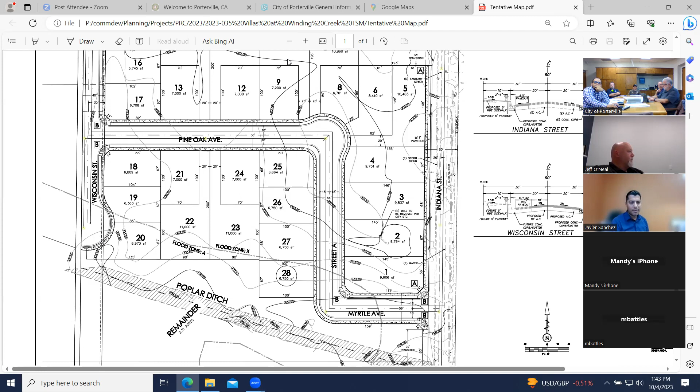As part of that, we also need to maintain the landscape strip around the bulb, and the sidewalk would still need to stay offset from the curb and gutter.

As far as the flood zone, where you show that designation, it's not that building is prohibited, but with it being flood zone A with no base flood elevation established, we'll need to meet certain criteria to have those be buildable. It may be worth looking into the FEMA requirements more to make sure no analysis is required beyond what our local floodplain ordinance states.

Would that apply specifically only to lots 20 and 28? 20 and 28, unless it encroaches slightly into 1, 27, 23, 22, and 19, if a structure is built within that floodplain. But for sure there's no way around it on 20 and 28.

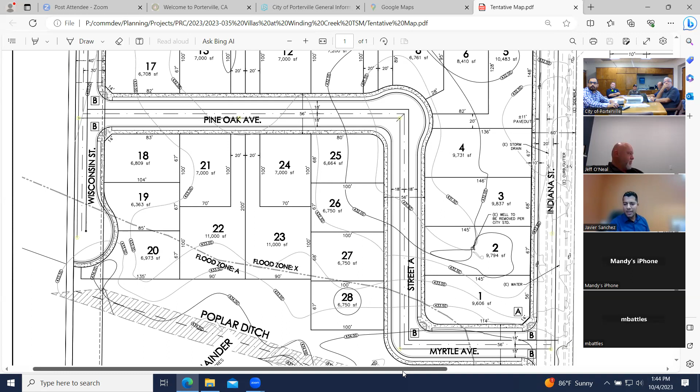Thanks. And then on Indiana, we see—I'm assuming there's a block wall proposed along the Indiana lots, right? Correct.

Our development ordinance requires separation between the back of walk and a wall. Typically we've done 10-foot landscape easements, but I need to discuss that further with planning as far as whether there's variance on that, because it will affect the depth of those lots and potentially the buildability of lot 5.

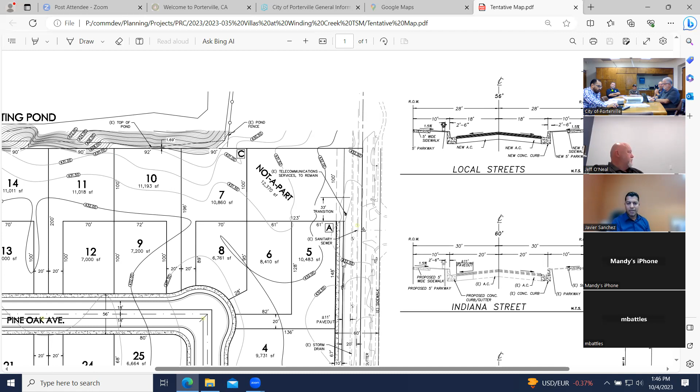But otherwise, the cross section looks good on Indiana. Even though the circulation element shows a major arterial continuing north of Gibbons, since the connection across the 190 isn't happening, the demand for a major roadway isn't necessary, so this will just be a standard local collector instead, which complies with the 60-foot right of way you show.

So the only thing we need to talk about more, and we'll provide direction in the comments, is the necessary landscape easement. Besides that, Public Works was going to talk about an easement line from the ditch to the pond. That's all for engineering.

Javier, I'm a little confused—if Indiana's not a higher density or classified street, and it's actually a collector width, then why is the wall even going to be a requirement? It applies to both arterials and collectors—the landscape requirement, that landscape separation between a back of walk and a wall.

It doesn't apply to local roads, residential roads, right, Javier? Correct. Well, it does—the development ordinance states that when there's a condition of a back of walk to a hard edge like a fence, there's a requirement to maintain a minimum of 5 feet separation.

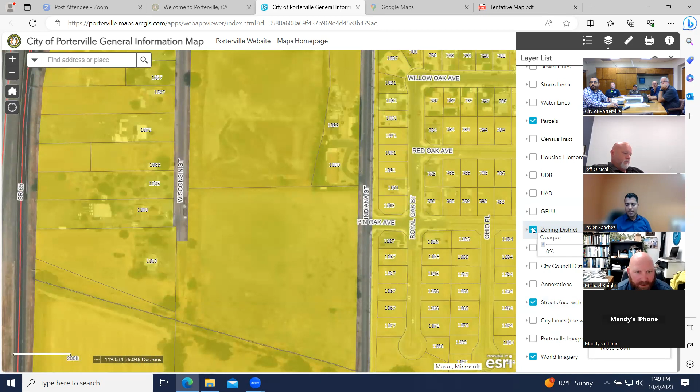Thank you, Oscar. I know we've had some tentative discussions regarding the alignment of the property line adjacent to the ponding basin to the north of the proposed development. We'll need to look at that. I'm sure you've already had that surveyed, Tom, and we can go through what that property acquisition looks like for the right of way for the existing pond. There's also been discussion about the current delivery mechanism, the turnout from the poplar ditch that goes into that ponding basin that feeds it.

The hope in previous discussions of projects proposed in this area would be that as the storm drain is developed for this property, it would turn out and deposit into that ponding basin. Anything beyond the service of the subdivision would be a reimbursable cost to extend that and restore the connection to the poplar ditch. That's been discussed under previous proposed plans and would be the same condition under this development.

Are we allowed to use the Indiana Street storm drain that's existing out there? If I put some catch basins and catch everything off of Myrtle and put it out there? The proposed alignment would be off of Wisconsin. Yeah, I'm possibly going to use catch basins, tie into the Wisconsin pipe that's going to be put in there for our runoff, but I also want to use Indiana as well. Yeah, that would be acceptable.

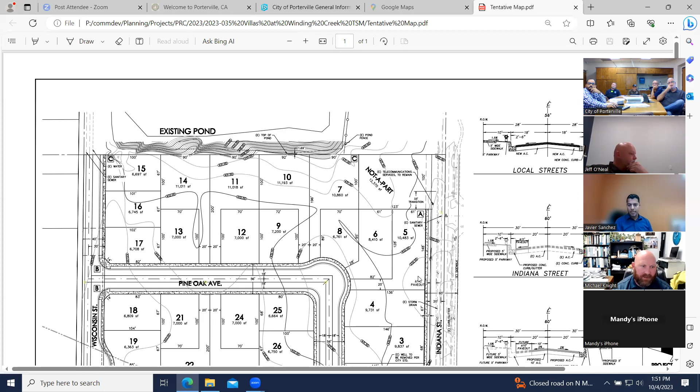Okay, so there's still a little bit more on the plan as we move through this. If you could go back to the plan, Oscar, please. So as you see, I'm assuming your last connection point to that basin would be off of Pine Oak. Yeah, correct, so the extension—that's for the Wisconsin side. Correct, so to maintain that connection point that has been a service to that basin, we would maintain the connection down Wisconsin to reconnect back to the poplar ditch. Right. Okay. And that's probably the most of my comments at this time.

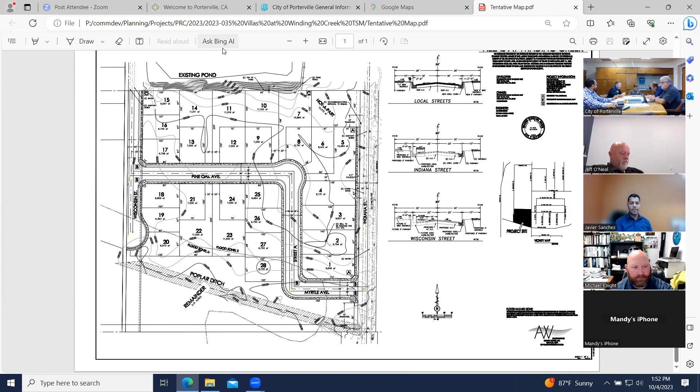The easy ones are basically the fire hydrant spacing: 500 feet for residential, and 300 for multifamily, commercial, or mixed-use projects. No structure shall be greater than 400 feet from a hydrant as the hose lays, and we must maintain 2 points of ingress and egress.

Now, the more difficult stuff is these flag lots, which are difficult for us to basically police access, the whole 9 yards, because we're dealing with human behavior. So I have a lot of comments, but to narrow it down, if this pathway exceeds 150 feet, there has to be a required fire department turnaround. We have to be able to get within 150 feet of the rear wall, halfway basically of the rear wall, as the hose would lay.

For example, if a fire truck came here and the house was built right here, as long as we measured 150 feet to that structure, then this doesn't require the turnaround, but it's still required to be a fire lane and marked as such. So with something like this, we would want that recorded, because they need to be maintained. They need to know that we can summarily abate cars parked there at midnight, for example, at the vehicle or property owner's expense. So those are difficult—there's a lot of comments in here, but essentially that's what that's all saying.

And again, we don't really know that until we start seeing the proposals for the development of the lots. But I want you to know, as a developer, that there's going to be some issues with regard to that as it moves forward. So.

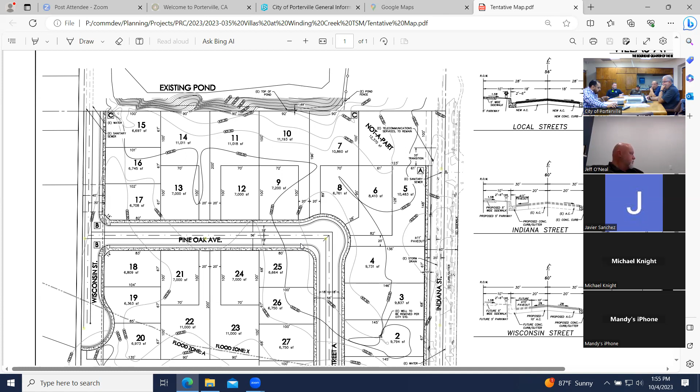Next with Brianna. No comments. Thank you.

Next with our police department with Mark. No comments from the police department. Thank you.

I believe that's all from staff. Refuse? Yeah, they said no comments.

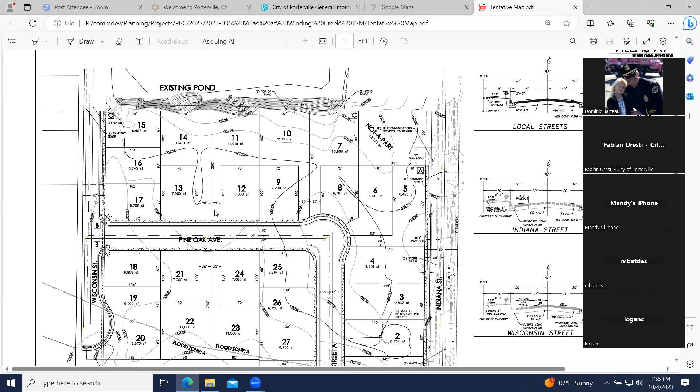On the refuse, the cans that come out - I've had places where they wanted us to mark where the cans are gonna be. You guys are okay with having them put out front, correct? Because the trucks won't be driving up in there. Would you be able to answer that, Brianna? Yes, just as long as they're out on the road. The trucks are not going to be driving onto those lots. Okay, thank you.

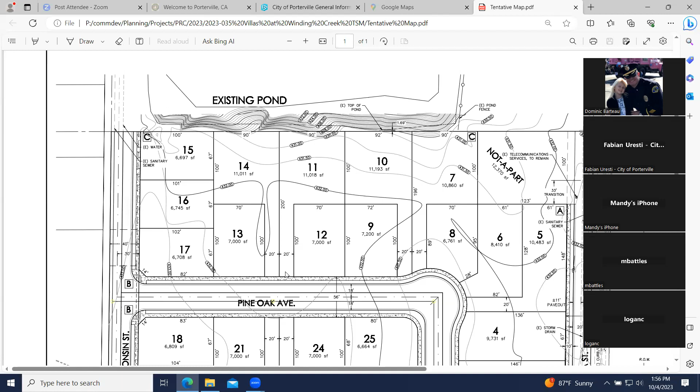Just to chime in, under the proposed layout, it's going to be a challenge because these lots in the back, like lot 11 and 12, will have to bring their cans out and sit them in front of lot 12. Depending on how those are configured with driveway approaches and parking on the street, those will be issues as we go to serve residents. It doesn't necessarily stop anything from moving forward, but it will be a challenge - either cans being missed because they're blocked or too close together, or other challenges with the layout as it exists.

Well, on those flag lots, are we allowed to do one single drive approach, or do we need a separate drive approach for each lot?

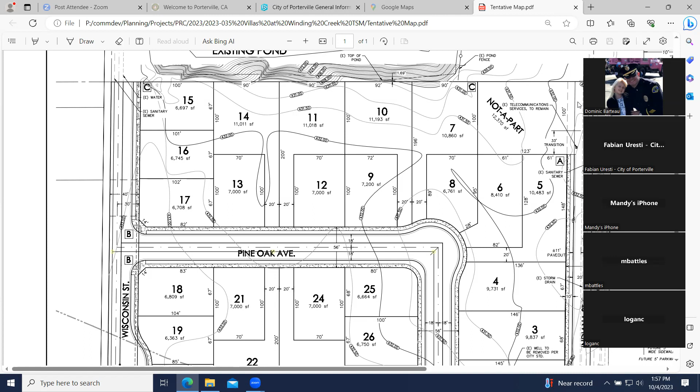From my standpoint, as far as fire is concerned, I need to have a minimum 20-foot access to get to the structures. I don't know what the city's going to require, but if that straddles the property line, it has to be recorded on both properties. If it does turn into a fire lane, it needs to be recorded so that it's protected.

I meant out here, for the drive approach - so there's gonna be 10 feet on either side for these people to put their access. I need to maintain at least 20 feet. So if you put in separate approaches, those may have to widen.

Did you catch that question, Javier? Yeah, it is typical practice that each property has their own access, but we're not against it being shared - easements just have to be put in place to make sure that access is maintained.

Thank you. If there's no additional questions from the applicant, we'll be compiling each department's comments in a letter that should be out in 2 to 3 weeks from today. Thank you.

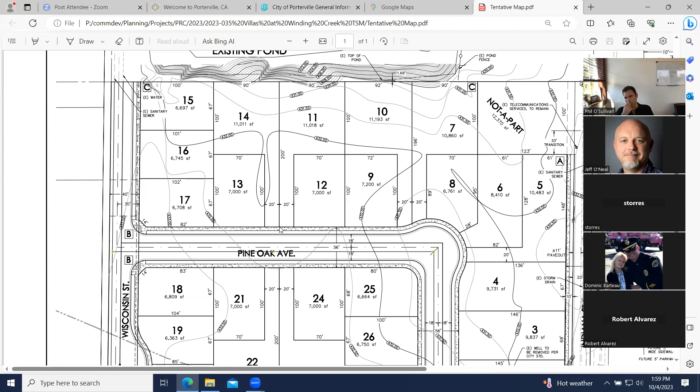So we have item number 2, which is project review committee number 2023-037, where the applicant is proposing a multi-family residential project.

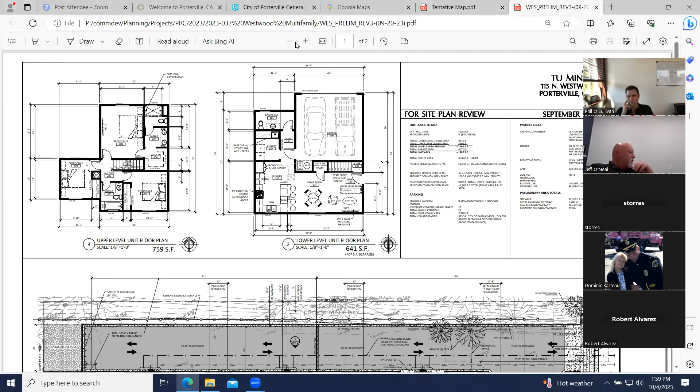Let me go ahead and share my screen here. So what the project is proposing is 3 two-story duplexes consisting of a total of 6 residential units. The subject property is located at 115 North Westwood Street, on APN 240092011. The property is in the RM3 High Density Residential Zone District and has the general plan land use of high density residential.

As far as comments from planning, the use is a permitted use. We do meet the minimum units per net acre, which at this time is 10 units per net acre, and that is the minimum.

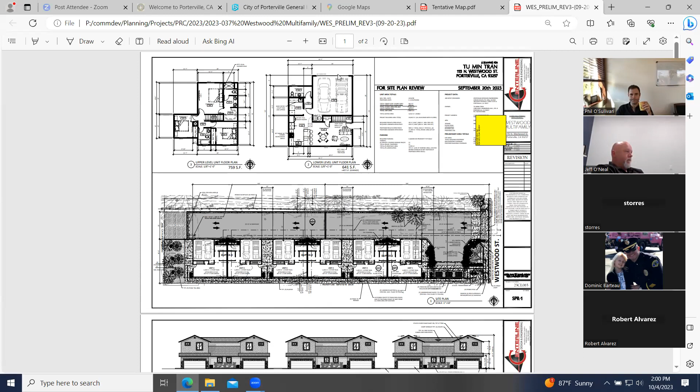As far as a question I have for the applicant - I did not see any private open space for each unit, which would be a requirement of a minimum of 50 square feet. The code states that the private open space shall be accessible to only one residential unit by a doorway to a habitable room or hallway. I do see you provide some open space, but I wasn't able to verify the private open space for each unit.

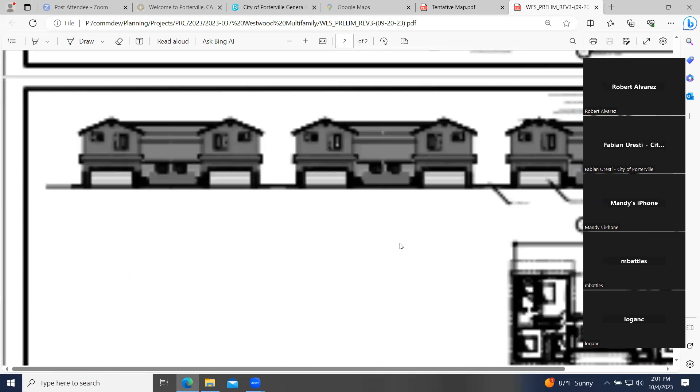As far as other comments, the structures do meet setbacks, meet our minimum architectural articulation for the units, and any landscaping complies with our section 303. The trash enclosure looks to comply with our development ordinance as far as design, location, and materials.

Any fencing proposed for the project needs to comply with section 300.03. Any signage complying with section 305.08, which allows multifamily residential projects 1 building mounted sign and 1 monument sign, with a maximum cumulative sign area of 32 square feet. Pretty much standard from our planning as far as complying with our development standards.

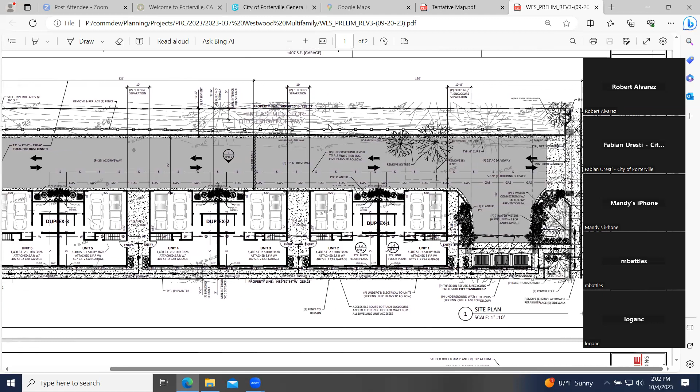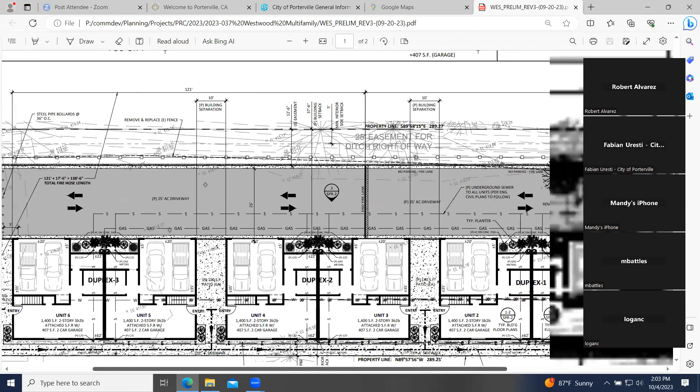That's our comment from planning. With that, I'll move along to the fire department with Clayton. Okay, so basically it looks like the proposal meets the requirements. I've just listed what's required: complying with the latest applicable codes, fire hydrants placed on distance, no structure greater than 400 feet, hydrants in place and accepted prior to any combustibles being brought onto the site. You've addressed the common driveway issue being 150 feet or greater. Required fire apparatus access turnaround is not going to be required based on the proposal. Maintaining the minimum 20-foot roadways and address numbers. So as this proceeds, it looks like what you've proposed meets my requirements.

Thank you, Clayton. Next with engineering with Javier. For engineering, it's just providing a drive approach with an accessible path around it and providing a street light at the north end of the property. And that's all engineering has.

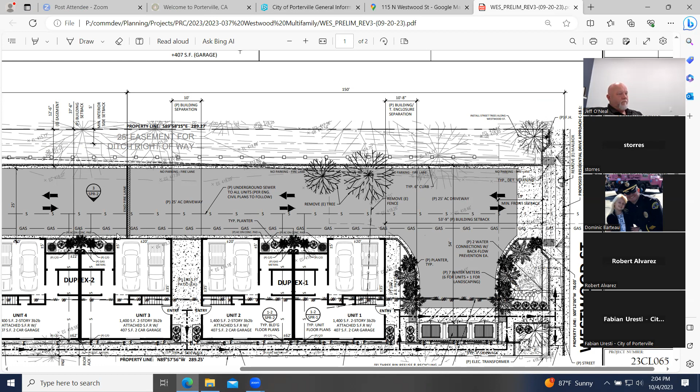Thank you. Next with building with James. Thanks, Oscar. It looks like standard construction, so any comments from me would be during plan review, but no comments at this time. Thank you. Next with Robert. No comment. Thank you. Next with Brianna. No comments. Thank you. Next with Mark with our police department. No comments. Thank you. Any comments from our public works director? No comments. Thank you.

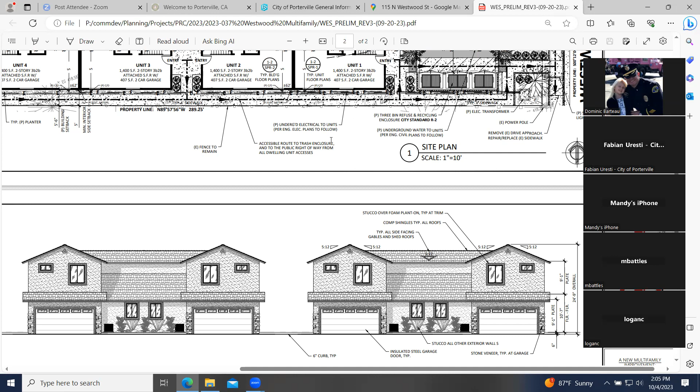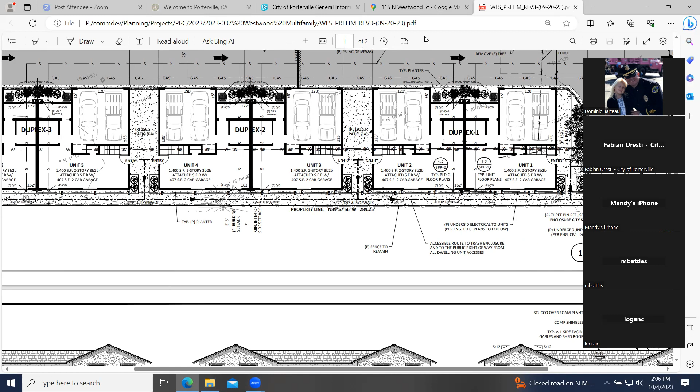That's gonna be all from staff. Are there any questions from the applicant related to today's application? No questions. We'll revise that private space, Oscar, and then proceed with getting full construction drawings submitted to you guys as soon as possible. Sounds good. Thank you, Logan. We'll provide these comments to the applicant in a 2 to 3 week timeframe from today's meeting. I'd like to thank the applicant on the proposed development and look forward to getting this finalized. Thanks, guys. Thank you.

And then we have the third item on today's agenda, which is Project Review Committee number 2023-038 for Sports Cuts, located at 41 North Main Street.

So we do have the application. Revised it? Yeah, they revised it. The application proposes a project for the barbershop, which is a barbershop with a sports lounge. The applicant is requesting a conditional use permit for alcohol sales under a type 48 license.

I'll start with planning's comments. The use would require approval of a conditional use permit, which will be a public hearing. It's a discretionary process from our city council. There are fees associated with the conditional use permit; that fee is $1,164. It will require an environmental assessment, but we can make the preliminary determination that it could fall under a category of exemption, for which the city will still provide a notice of exemption document for a fee of $79.

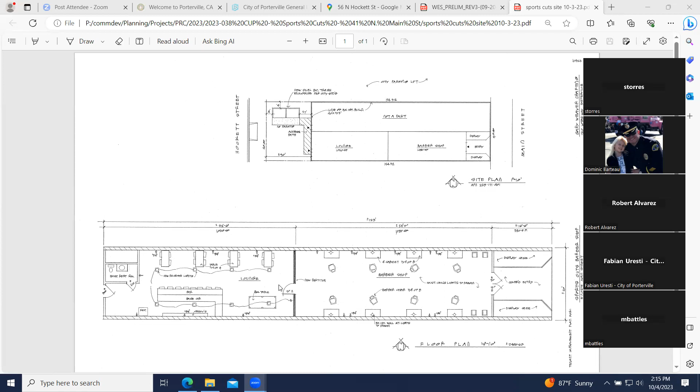It's hard to judge that. What we do during plan review and inspections is just go off of how many fixtures there are - we can tell if that's going to be enough. We shut the lights off, the emergency lights come on, and we make sure it's bright enough. A person in the dark should be able to see, hey, that's a table and chair, I need to go around that - rather than being stuck in the dark not knowing how to get out. You can see the exit sign, but then you're tripping and falling and people are tripping over you because you can't see.

Some of those lights get mounted on each side of the room, and some get mounted in the light fixtures themselves inside the space, so there's more than one way to do it. These have a battery backup, so when the power goes out, the light just stays on - they have a red light on them. So that emergency lighting is important, and a good rule of thumb is in the dark, when you activate the emergency lights, you should be able to see your feet - you should be able to see your toes.

Another thing - the 2-hour rated wall. Everywhere I've looked they say 1 hour, and I've seen that you double back it or something - there's a standard for a 1-hour or a 2-hour wall. So the code, when you look between an A2, which would be the bar lounge, and a B, there's a table that tells us what hour rating that separation needs to be. So it is a 2-hour wall, and I can show you that if you need.

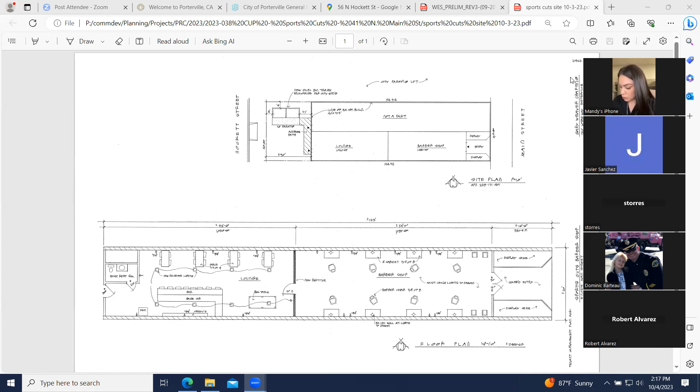We also need the separation between the north section as well. But there's more than one way to build a 2-hour wall, a 1-hour wall, or a 4-hour wall. So each wall has a design that's gone through and passed that says, here's how to build a 2-hour wall. Gary would just need to get on the internet, find the design - there's a code number that'll say, design is 10024 or whatever, and we can look that up and confirm it's correct. There's a detail showing a side view of how that wall is built.

Like Clayton said too, the wall between - since it is one building, with the north part, even though it's not being used - the code between a B and an M, or an A2 and an M, would have to be looked at too. Those wall ratings would need to be constructed to meet that requirement. Your A2 is always going to be the most restricted because there's a lot of people in there, people are drinking - the code doesn't look at alcohol, it just looks at safety.

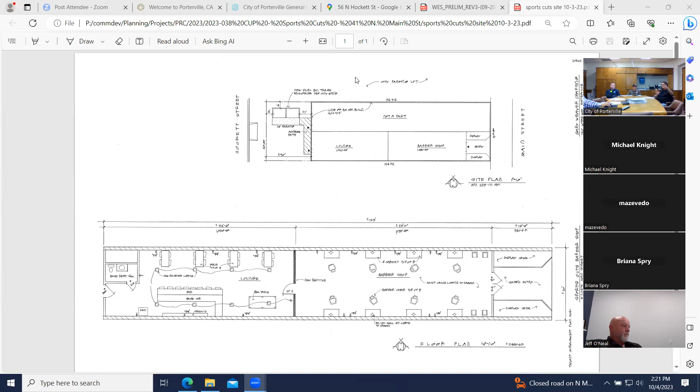Oh, and the bathroom, is it, because there is the bathroom on that building. There's a door to the other bathroom. Well, that brings up another point, because I think a type 48 doesn't allow children to come in and remain in the bar area. So if your patrons are gonna have to access the bathroom, how does that work with them, going through the bar?

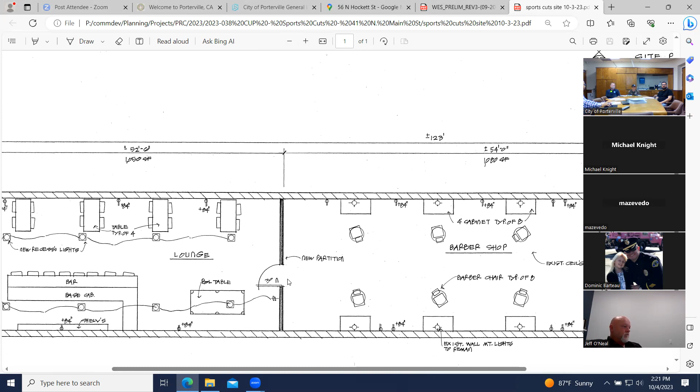Yeah, if that's not allowed. Clayton, Mark has some of those notes when police have comment. If that's not allowed, then you would have to have another restroom for the barber shop. But the restroom for the lounge, as it lays out on the plans, would need to be upgraded to be accessible.

Would there, like, okay, say if I were to do that bathroom right there and say we're in the front, the people cutting hair, what if there's a rear access to that thing and it's blocked off right there? Like, say someone says, hey, I want to use the restroom, and you're in the barber shop, and I tell them, hey, you could go through the back, but you have to go through the outside, and there's a rear access to that bathroom.

Believe it or not, as long as there's a path of travel to it, meaning not through the parking lot asphalt itself, it is allowed, because there's a sidewalk right on the side of it, as long as that sidewalk meets the accessibility width. I don't think that does. Yeah, it's gotta be at least 4 feet.

It has to be accessible to anybody who needs to use it. But you could put one in the barber shop corner right there. And not to say they couldn't use it from the lounge, but the barber shop has to have a bathroom. If you have two occupancies, if you're separating it and you have two occupancies, and the police department will comment, but if the barber shop can't go through there to use that one, then your barber shop would need one.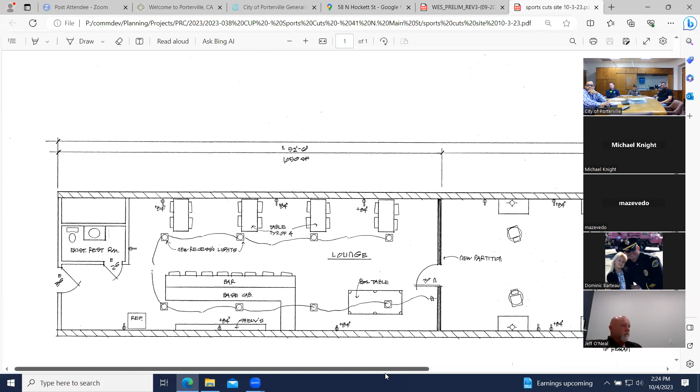And nobody under 21 will be allowed into the bar area from the barbershop or anywhere else. I heard you mention the type 47. I'm just not familiar with the type 47 license. That may change things, but that would have to go through ABC. I may have to do a little research on that, but that's my understanding as of now.

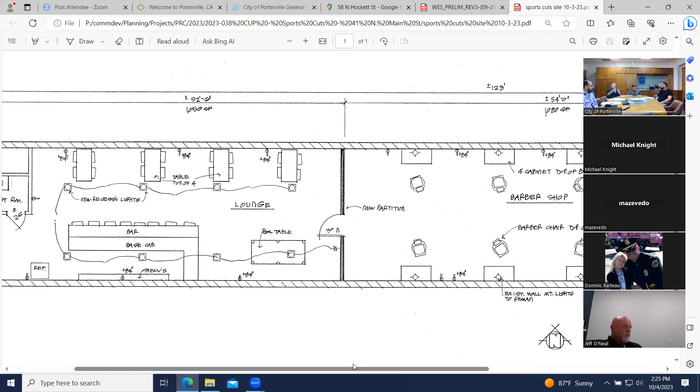Yeah, the 47 is just saying that we would have to serve some kind of food back there to make it work. And you're talking about putting in a commercial kitchen? Yes, the suppression systems, it changes things dramatically. Better off building another bathroom. But like James was saying, the patrons in the barbershop, based on their age, may not be able to go through the lounge to use that restroom. But there's nothing that says a restroom on the other side of that wall means the people from the lounge can't come out and use that restroom and then go back in. So potentially that may be a problem solver for you.

For clarification, technically speaking, if it's a type 48, minors are allowed to enter but they can't remain. So somebody could pass through that area to use the restroom, but they would have to immediately vacate it once they're done. Whereas a 47 is a general eating place that's similar, except minors are allowed to remain because they have substantial sales of food.

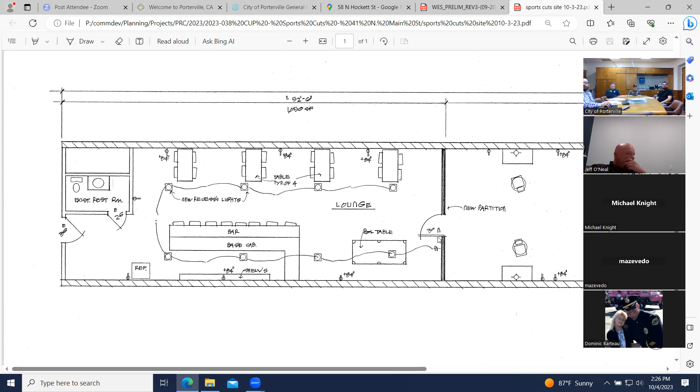Thank you. Moving along with Briana. I see the 2-bin enclosure, but that actually needs to be a 3-bin enclosure now for the state mandates.

What's the standard size for that 3-bin enclosure? It's 28 feet without landscaping. But then you gotta keep it 5 feet off the wall if the building is not sprinklered.

Could they put one bin on the opposite side? Could it be like a 2-bin enclosure and then one on the north side? Is that something that could be done? Briana, yeah, they don't have to be all in one enclosure. I mean, they can be separate just as long as there's space for all three.

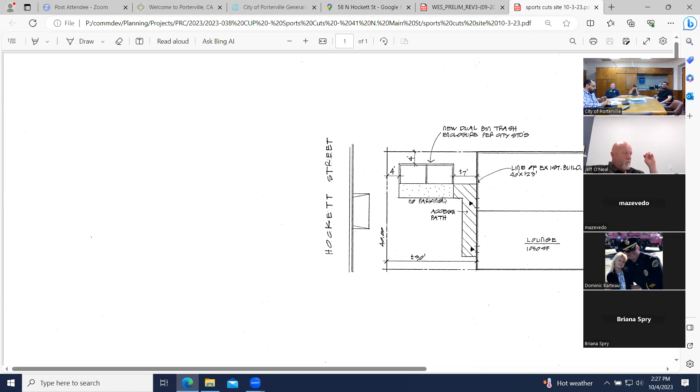Yes, of course. For the applicant, I heard earlier that the area is already oversaturated with on-sale or on-site consumption. Are you applying for a new liquor license for this area, or do you have an existing one? No, we applied for a new liquor license because there was some available through the drawing. The lottery, yeah. So we applied for one that I guess they had some available in Tulare County, so we applied for it.